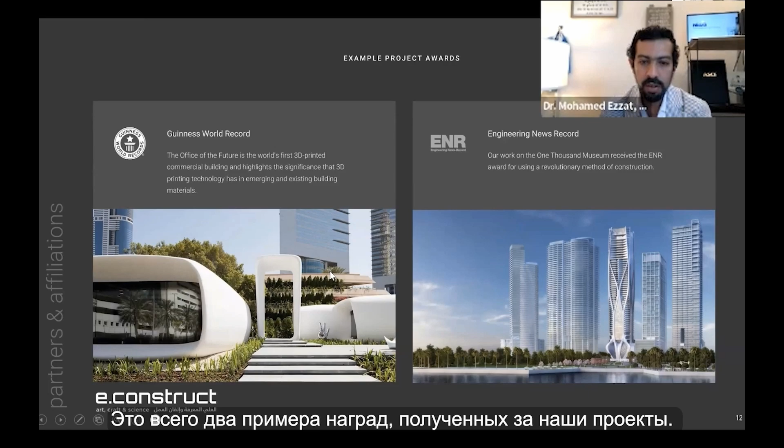Econstruct in general focuses on promoting the value engineering concept in many of our projects. We are collaborating with different contracting and consultation firms in optimizing the cost and time of each project through different value engineering approaches and through innovative design techniques.

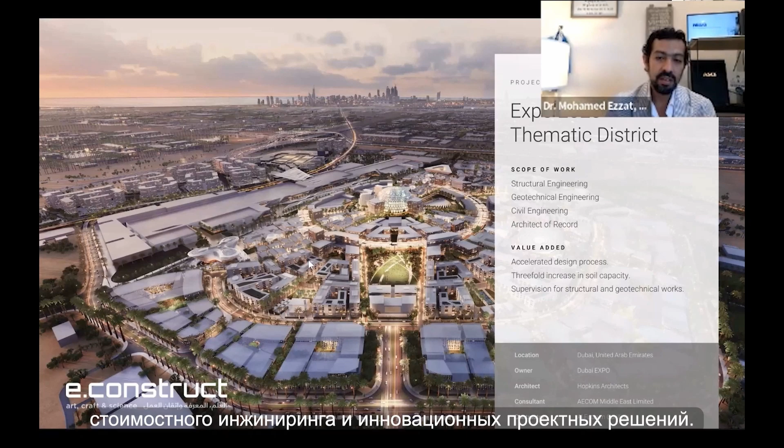One of the most innovative branches in Econstruct is VAES.AI. It's like a sister company working within Econstruct as well, but it's mainly involved in developing new software and AI and machine learning tools to promote engineering applications.

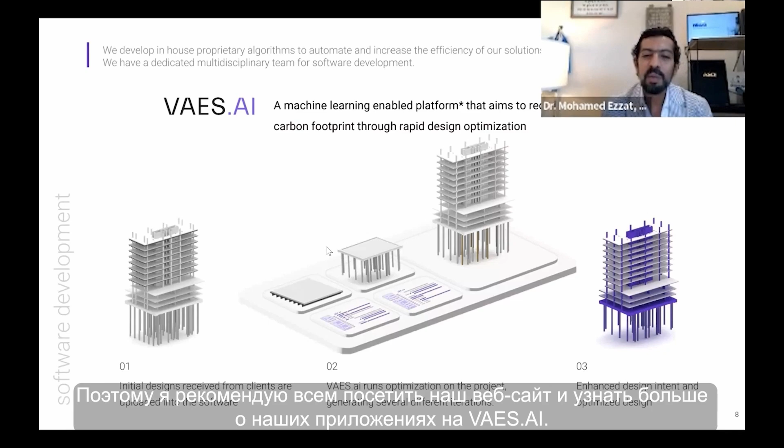Maybe today I will just give a quick exercise related to such an area, but for the geotechnical society, since we are talking today about geotechnical engineering, one of the favorite applications in VAES.AI is an application using a genetic algorithm to optimize pile foundation design. Such an application could help you in optimizing the number of piles, orientation of the piles, and lengths. For sure, all of us spend a lot of time doing hundreds or thousands of trials to optimize such a foundation system. So I encourage all of you to visit the VAES.AI website and know more about our application. Okay, now let's move to our topic today.

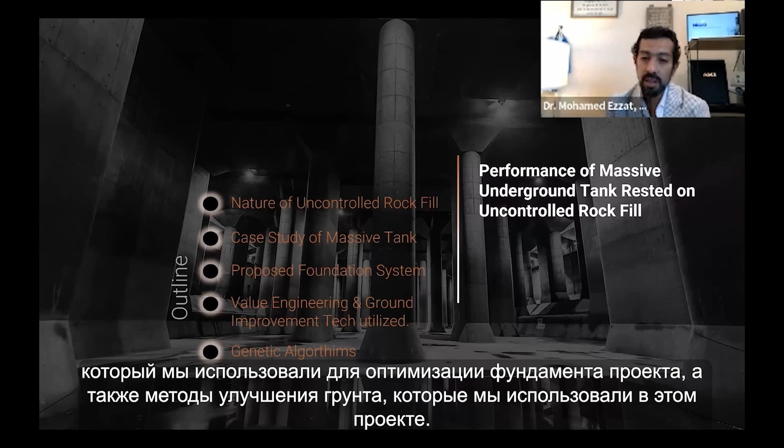As I explained, the title of my presentation will be Performance of a Massive Underground Tank Rested on Uncontrolled Rockfill. The presentation will cover the following items: nature of uncontrolled rockfills, a case study for a massive tank, proposed foundation system for this case, and value engineering, what we did to optimize the foundation system of this project, and the ground improvement technique we utilized in this project.

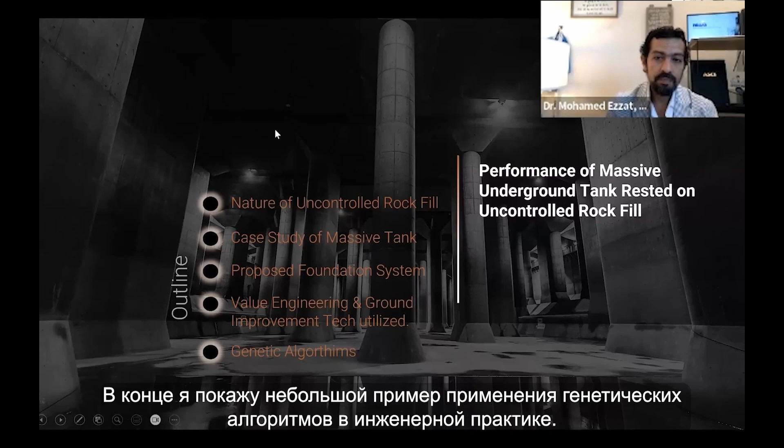At the end, I will show a small exercise for including genetic algorithm in the engineering methodologies. Okay, first, let me give you an introduction or just a definition about the uncontrolled rockfill. What is the nature of uncontrolled rockfill?

Uncontrolled rockfill refers to the placement of rock material without following strict engineering guidelines, such as proper compaction or grading and quality control measures. For sure, this type of fill often contains large voids and may vary significantly in size and composition, which for sure will affect the stability of such rock. As you can see in this picture, there is a large diversity in the sizes of the particles. Uncontrolled rockfill has a high potential for long creep deformation because of the restructuring under the different wet-shrink cycles or even under traditional loading.

Uncontrolled fill can pose a challenge for construction projects, leading to differential settlement, increased permeability, and reduced structural integrity over time. And for sure, careful attention shall be paid if the rockfill structure includes honeycomb-like zones, like you can see here in this picture, that are very loose and may experience local collapse. The extreme inconsistency in lateral and vertical direction is the main characteristic that can indicate the uncontrolled composition, and this can be observed through trial pits. Like the excavation you can see here, many voids can be observed, with large diversity in the particle size.

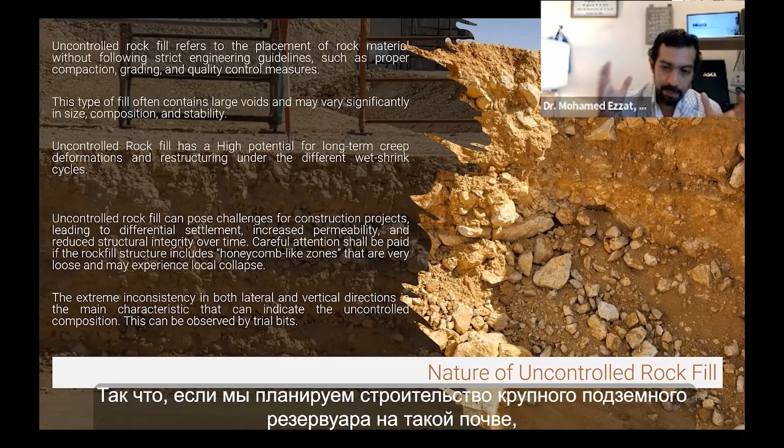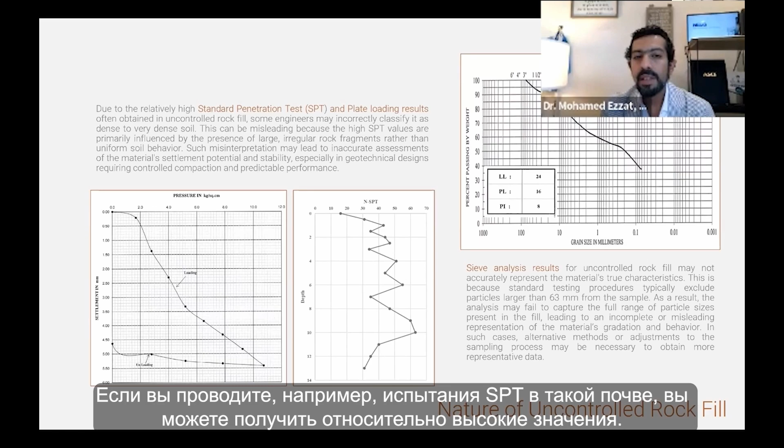So if we are planning to construct a massive underground tank above such a soil, this could be a challenging one. And here I have to clarify this point because this could benefit many geotechnical engineers. If you conduct an SPT test, for example, in such a soil, you may find relatively high values. In addition, if you conduct, for example, a plate loading test, the engineer could obtain very high results. However, unfortunately, some engineers may incorrectly classify this soil as a dense or very dense soil, which could be misleading.

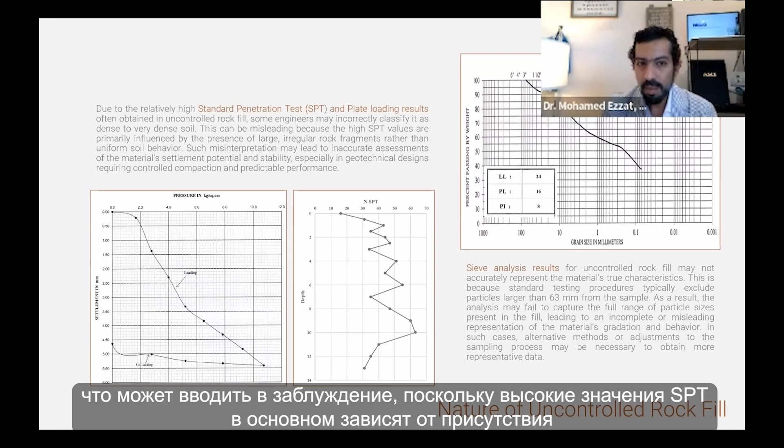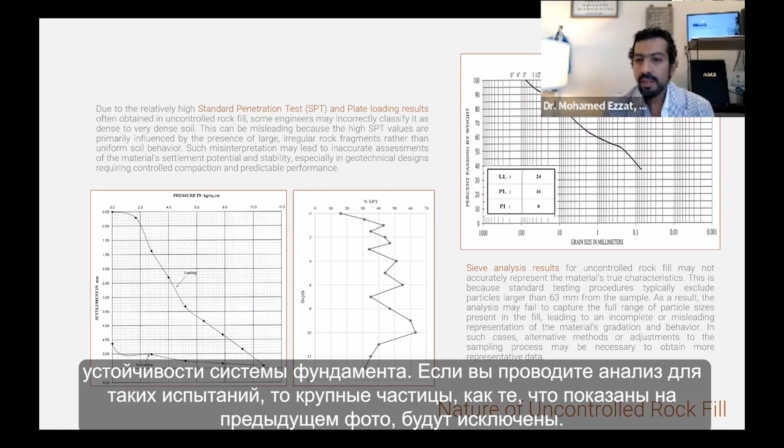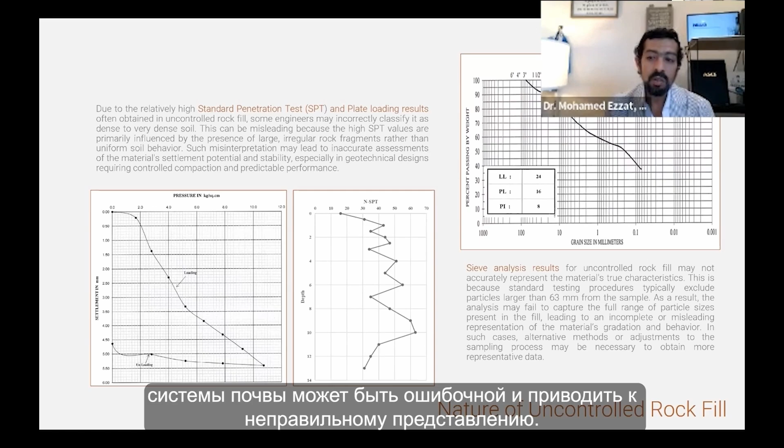Because the high SPT is primarily influenced by the presence of large and irregular rock particles, as you saw in the previous slide, the shape of the soil and the image of the soil. These rock fragments, rather than uniform soil behavior, are huge blocks within this soil. Such misinterpretation may lead to inaccurate assessment of the material settlement potential and for sure the stability of the foundation system. If you do sieve analysis for such tests, for sure, the very large particles like the one shown in the previous photo will be excluded. As you know, most of the standards recommend that particles with size higher than 63 millimeters be excluded from the sample. So you may not experience such large boulders within the sieve analysis test, and accordingly, the classification of this soil could lead to a misleading representation.

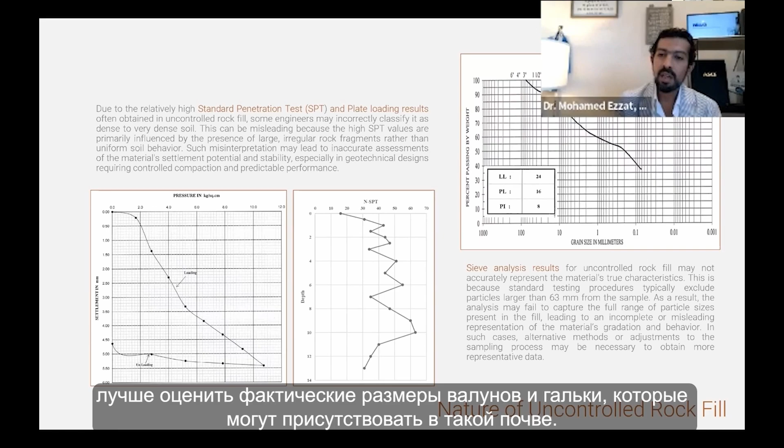So in such cases, alternative assessment methods could be utilized, like trial pits and open cut excavation, to realize the actual sizes of the boulders and cobbles that may exist within such soil. The tank we were planning to construct above such uncontrolled rockfill is a massive tank. Its width was around 37 meters, and the length was around 21.8 meters, with height varying with the level, but at minimum around 6.4 meters. The water capacity of this tank was around 4,000 cubic meters of water. The expected ultimate stress was around 385 kPa, which is for sure a heavy and massive tank.

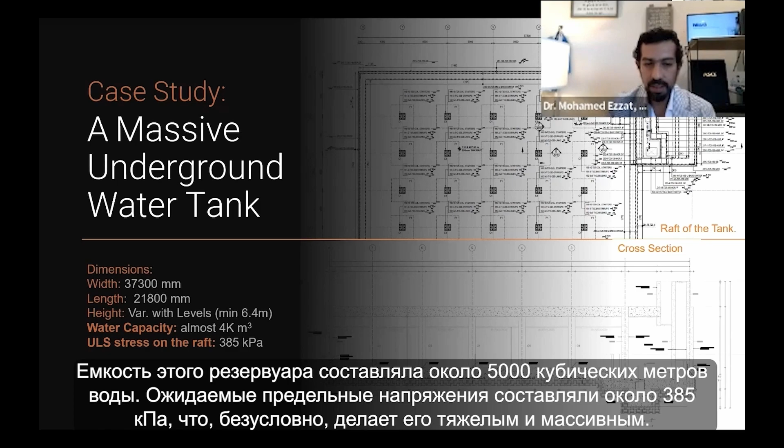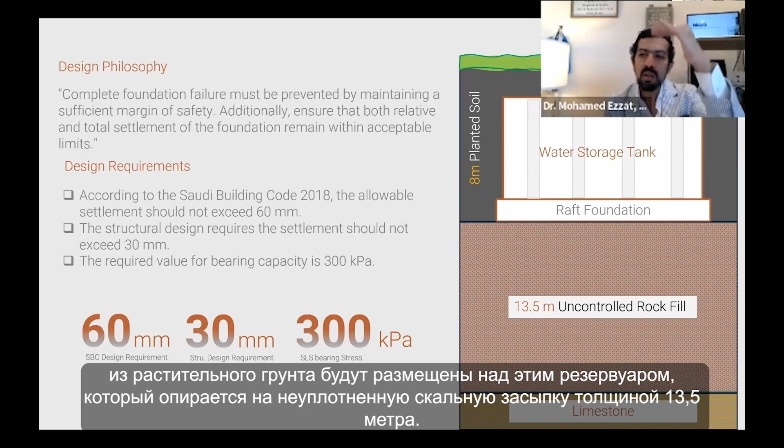This is a summarized cross-section explaining the condition. We have the massive water tank, and 8 meters of planting soil will be filled above this tank, and this tank rests on the uncontrolled rockfill with a thickness of 13.5 meters, and under this uncontrolled rockfill there was a limestone layer. For sure, like any foundation system we design on a daily basis, the foundation design must prevent failure by maintaining a sufficient factor of safety.

Additionally, we have to ensure that both total and differential settlement are within the accepted range. The design requirement for this massive water tank was, for sure, to follow the country standard. According to the Saudi building code, the allowable settlement of any foundation raft should not exceed 60 millimeters. However, the structural design of the tank limits this settlement to only 30 millimeters to maintain the structural integrity of the tank. So we have a strict requirement: the total settlement should not exceed 30 millimeters.

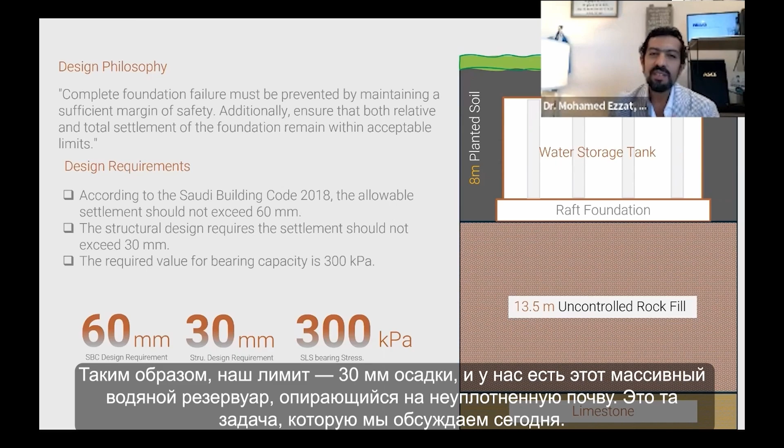Also, the working bearing pressure should not exceed 300 kPa. So we have this 30 millimeter settlement, and we have this massive water tank resting on uncontrolled soil. So this is the challenge we are discussing today.

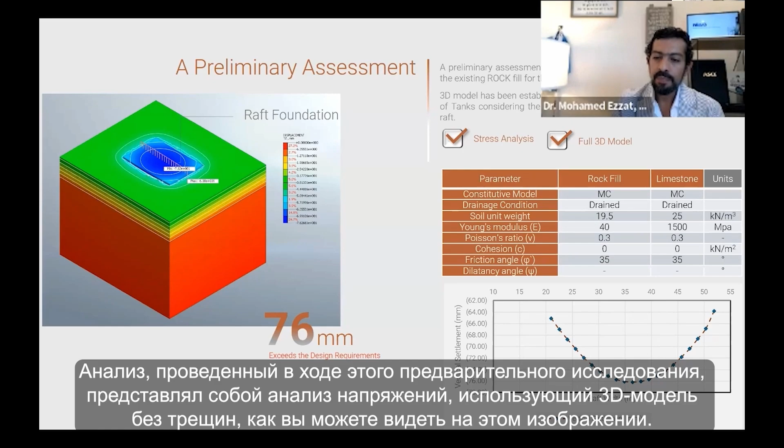After this, we took the second traditional step, which is: what if we replace some of the uncontrolled rock fill with engineering fill with very good properties, with a high modulus of elasticity and high friction angle? We tried to replace the first meter, then the second meter below the raft, then the third meter and fourth meter. So we extended our trial to replace 4 meters below the raft. Through stress analysis in the 3D model, the settlement reduced to 61 millimeters after replacing 1 meter below the raft, then reduced again to 52 millimeters when we replaced 2 meters. Finally, when we replaced 4 meters below the raft, the settlement was 50 millimeters.

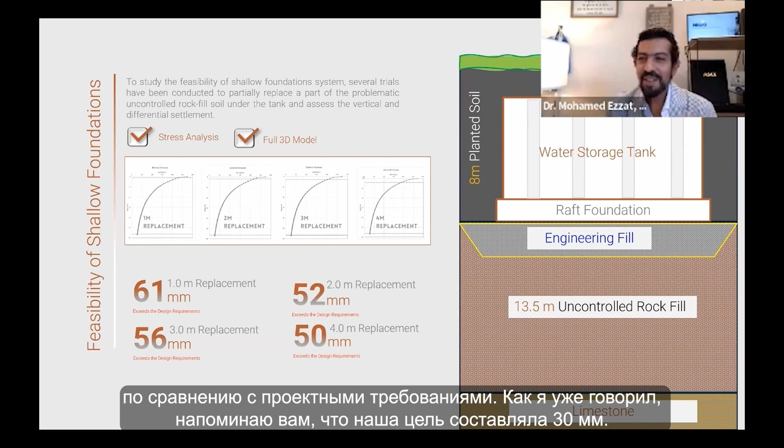For sure, this gives us an indication that the shallow foundation will not be feasible in this case, because this is a very large settlement compared to the design requirement. As I mentioned, and I remind you many times, our target was only 30 millimeters. So we started to think about deep foundations. At one location on the same site, a bi-directional loading test was conducted for one of the piles. So we started to study the result of this loading test before taking the decision on deep foundations. As all of us know, a deep foundation solution is very expensive, and this was not only one tank, it's many tanks distributed across the project. So taking this decision would be a very costly decision.

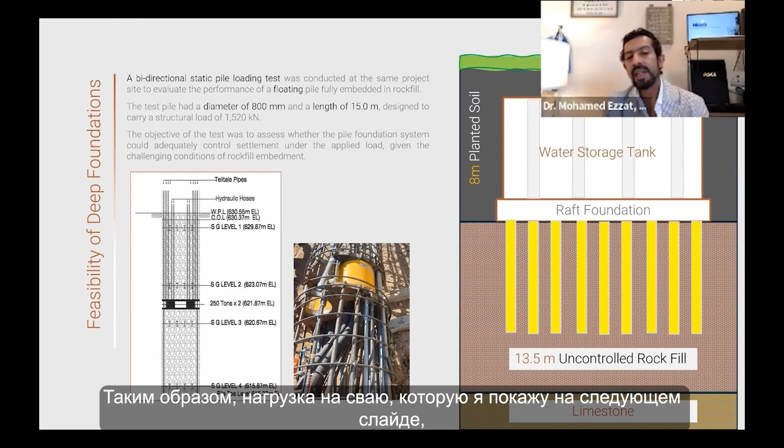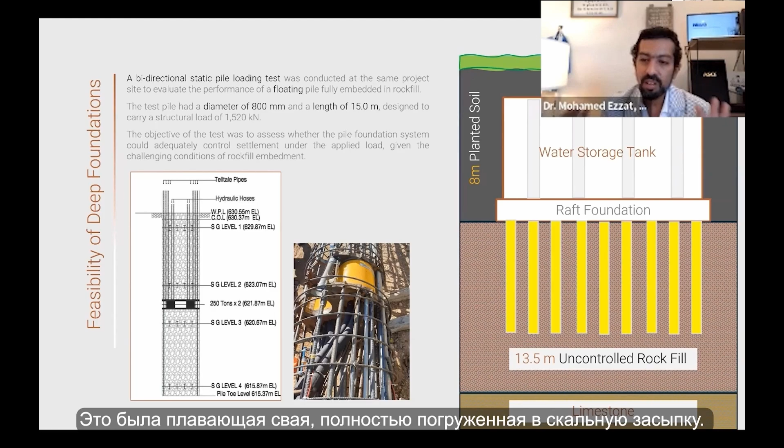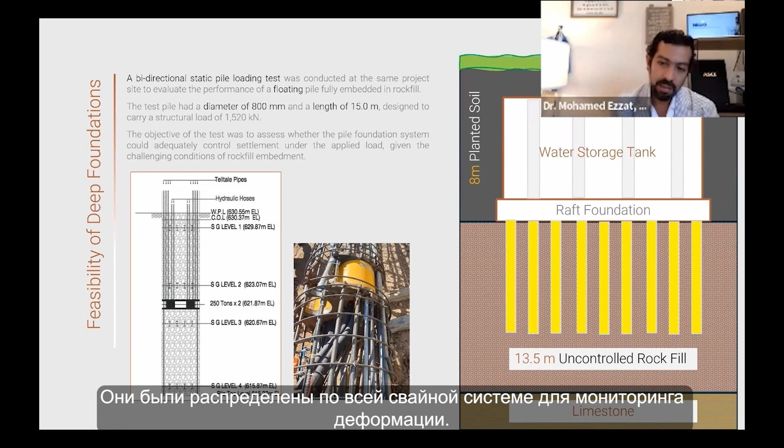Besides, we had to study whether this deep foundation or pile system would be feasible if implemented within this uncontrolled rock fill. The pile load test, which I will show in the coming slide, was for a pile with a diameter of 800 millimeters and a length of 15 meters. It was a floating pile completely embedded in the rock fill layer. This is a traditional setup of the bi-directional static pile loading test, where the upper part is pushed up and the lower part is loaded vertically. For sure, there were strain gauges distributed along the pile to monitor the deformation at several levels.

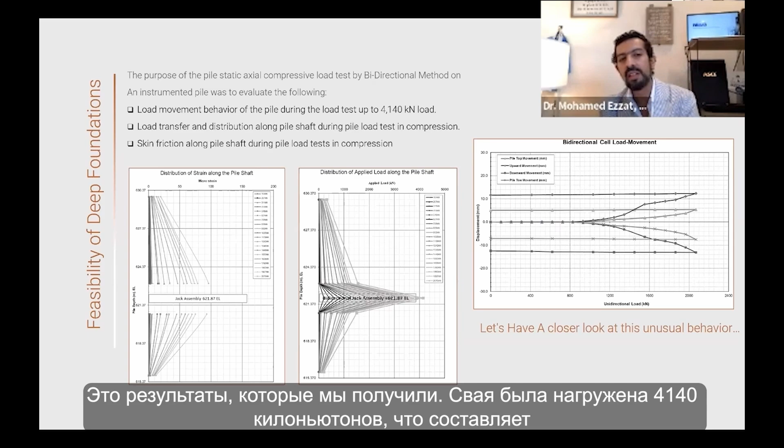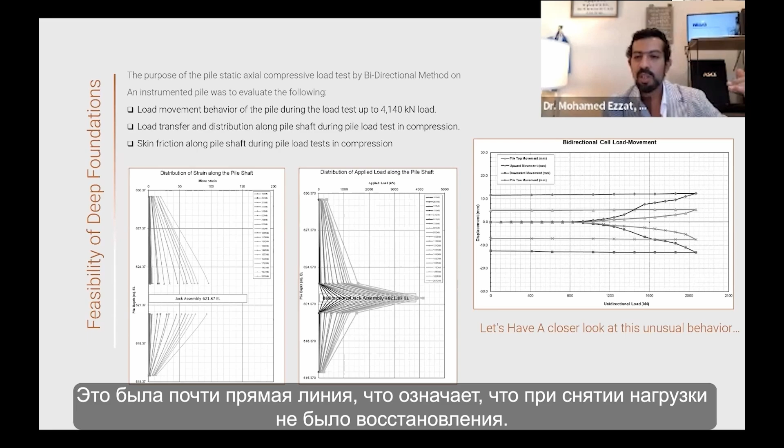These are the results we obtained. The pile was loaded with 4,140 kilonewtons, which was three times the design load of this pile, and the load transfer and load distribution along the pile were measured. You can see here the unusual behavior of this pile. When the pile was loaded, the unloading behavior, for example in the lower part, was almost a steady line. It was almost a straight line, which means that no rebound was obtained when the load was removed. So when the load was applied, settlement for sure started to increase, and when the load was relieved, no unloading deformation was obtained, or only very minor values. So let's dig deeper and take a closer look at this unusual behavior. I'm not sure if you have experienced something like this before or not.

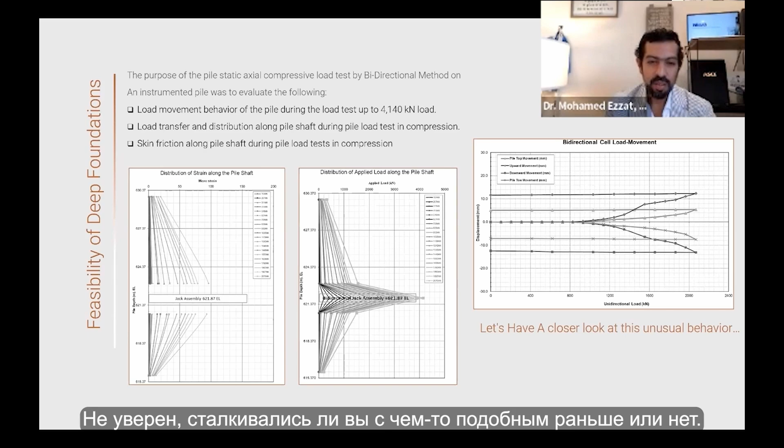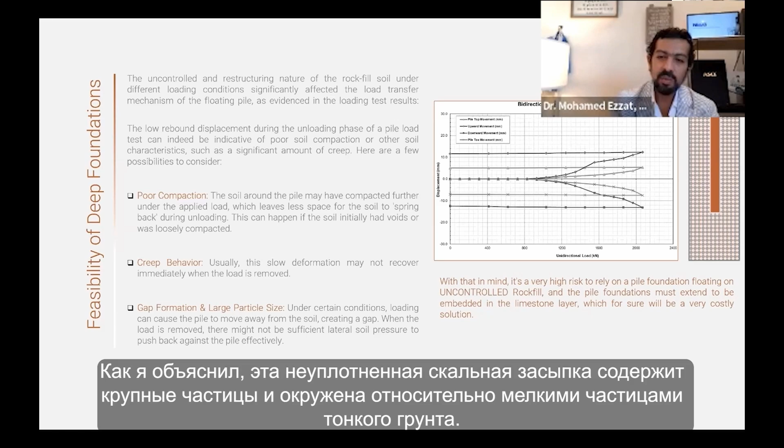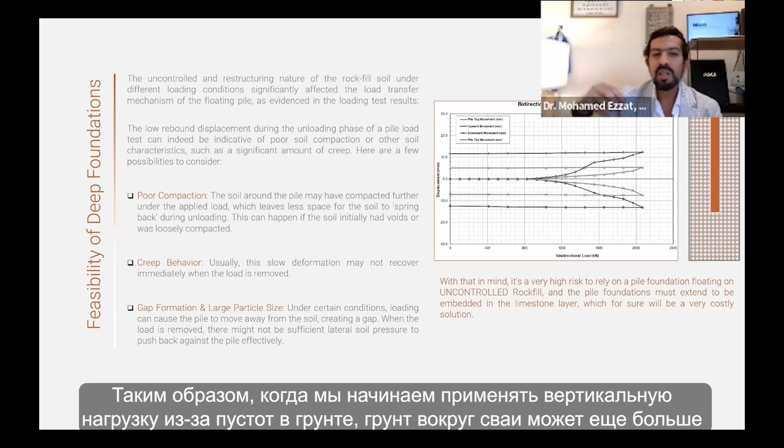This was our expectation about the behavior of this point. As I explained, this uncontrolled rockfill has large particles surrounded with relatively small particles of fine soil. So when we start to apply the vertical load, due to the poor compaction, the soil around the pile may be compacted further under the pile load, which leaves less space for the soil to spring back. This means that the applied load continued the compaction process, which was initially poor. This can happen in soil that initially had voids or very loosely compacted soil.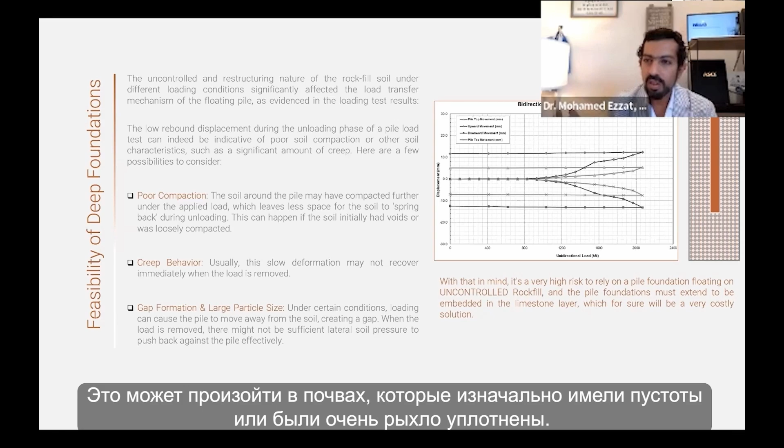The second expectation was the creep behavior. Usually, the slow deformation may not recover immediately when the load is removed. The third expectation was the gap formation. As you saw in the image of this uncontrolled rockfill, there are what we call honeycomb-like zones. Under certain conditions, the loading can cause the pile to move away from the soil, creating a gap between the pile and the soil. When the load is removed, there might not be sufficient lateral pressure to push back the pile effectively. That's why the unloading deformation was very minimal in that case.

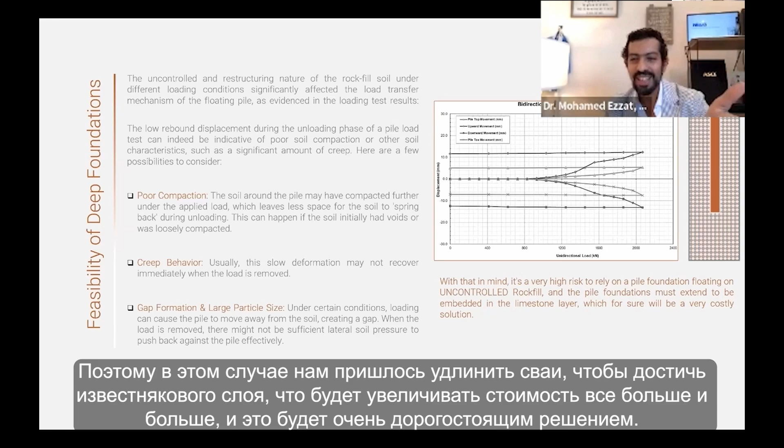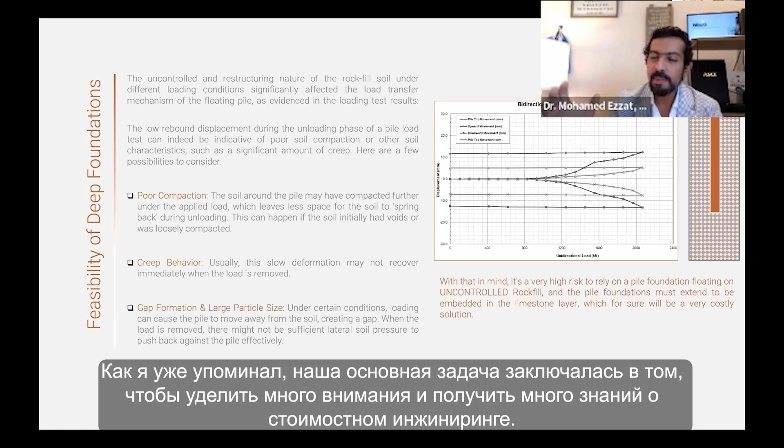So with that in mind, it could be very, very risky to rely on a pile foundation floating in uncontrolled rockfill. So in that case, we had to extend the pile length to reach the limestone layer, which will increase the cost more and more, and will be a very, very costly solution. So with this, we mainly commented on the feasibility of shallow foundation and deep foundation in such a case. As I mentioned, our scope is mainly to give a lot of attention and care to value engineering.

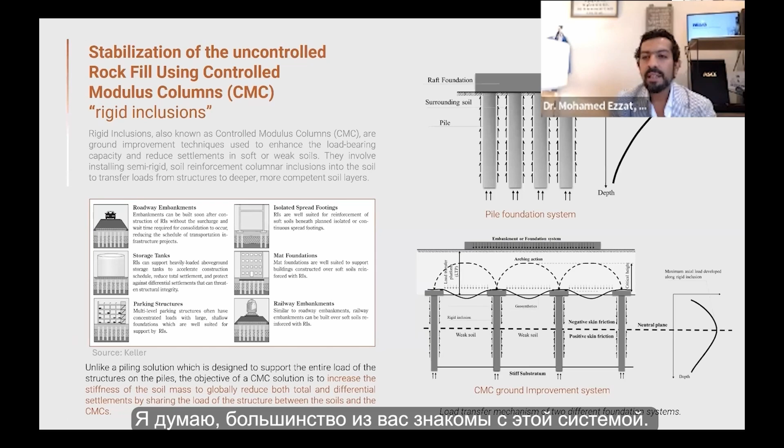So what was the proposed solution for this unique case? We proposed stabilizing this uncontrolled rockfill using controlled modulus columns, which is CMC, or commonly known as rigid inclusion. I guess most of you may be familiar with this system. It's a column installed inside the soil that will be stabilized, and above these columns there will be a load transfer platform, LTP, and the foundation system, like any shallow foundation system, is placed above this load transfer platform.

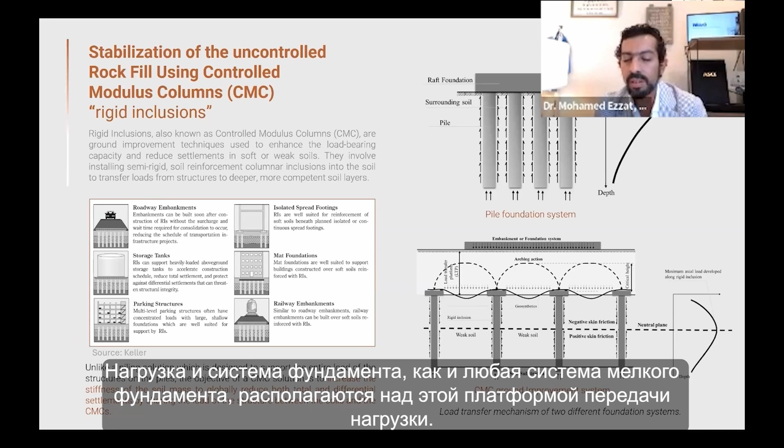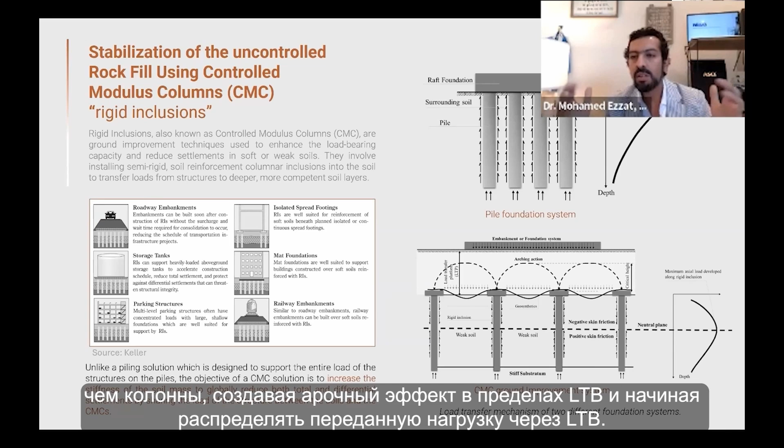The main load transfer mechanism of this system is the arching action. When the load is applied above the LTP, the soil between those columns will settle more than the columns or the piles. So this will create arching action within the LTP and start to distribute the load through the LTP onto the pile head more than the inside soil. It's commonly used in several applications like roadway embankment, storage tank, parking structure, isolated spread footing, mat foundation and railway embankment. For sure, it's commonly used also with storage tanks like the case we are experiencing today.

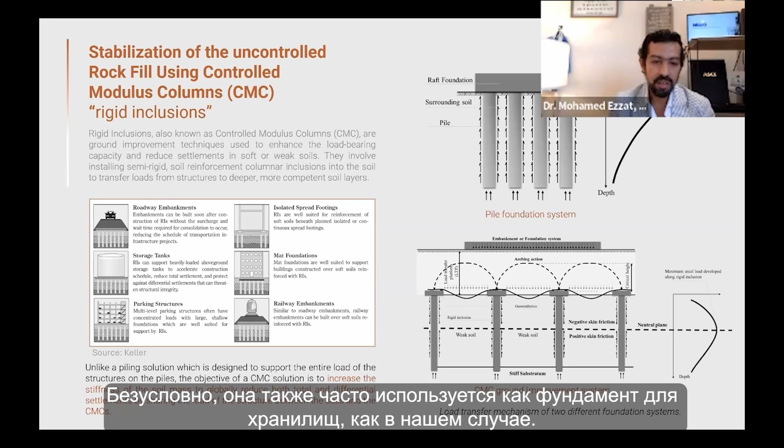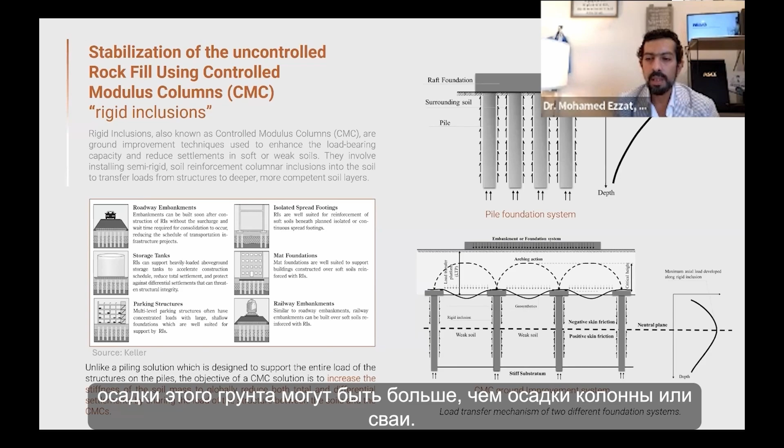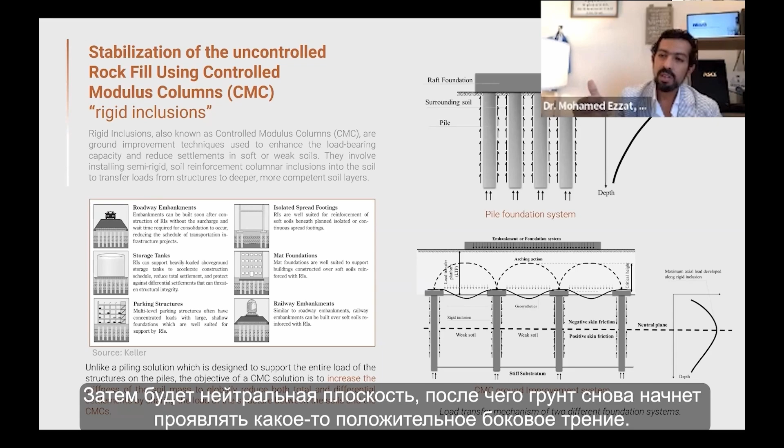The main difference between the behavior of a pile foundation and a CMC system is the load transfer mechanism. Mostly, if you have the pile within good soil, you will have the traditional pile load distribution, where some of the load will be transferred through friction, and some of the load will be transferred through bearing at the base of the pile. So this is a traditional positive skin friction most of the time. In the CMC case, since we are dealing with an expectation of high settlement or soft soil, the settlement of this soil could be more than the settlement of the column or the pile. So there is a great expectation for negative skin friction, like you can see here. Then there will be the neutral plane, then the soil will start to have some kind of positive skin friction again. So the load distribution could take this shape.

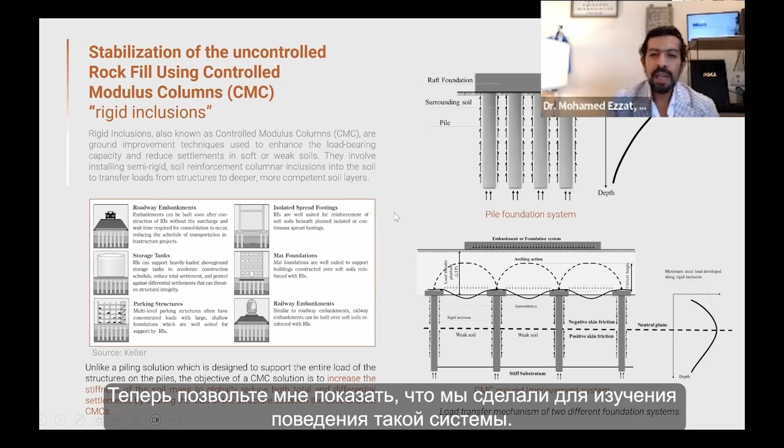Now let me show what we did to study the behavior of such a system with our tank. This is a 3D finite element model we developed using MIDAS GTS NX, and it was again a stress analysis to study the settlement. As you can see here, the soil layers were simulated: the rock, uncontrolled rockfill, then the limestone layer, and above this layer there will be the LTP, which is a granular soil with very good properties, with a high friction angle value and a relatively good modulus of elasticity.

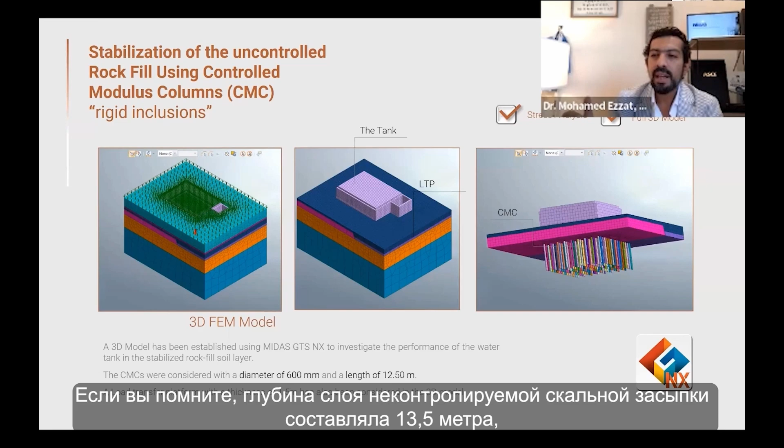And then under this LTP, there will be the columns or the CMC piles, which are distributed in a square pattern. We tried 600 millimeter diameter columns with lengths of 12.5 meters to rest on the limestone layer. If you remember, the depth of the uncontrolled rock fill layer was 13.5 meters, and if you deduct the LTP thickness, you will have about 12.5 meters length of the columns.

So what we found is that CMC with the LTP was able to control the settlement of this raft. If you can see here, the settlement of the raft has significantly reduced to 26 millimeters, which is less than the 30 millimeter benchmark, our target value based on the design requirement. Also, we checked the settlement of the columns themselves. It was also within the accepted range. The vertical stresses of the raft were also within the range, which may confirm the viability of this solution.

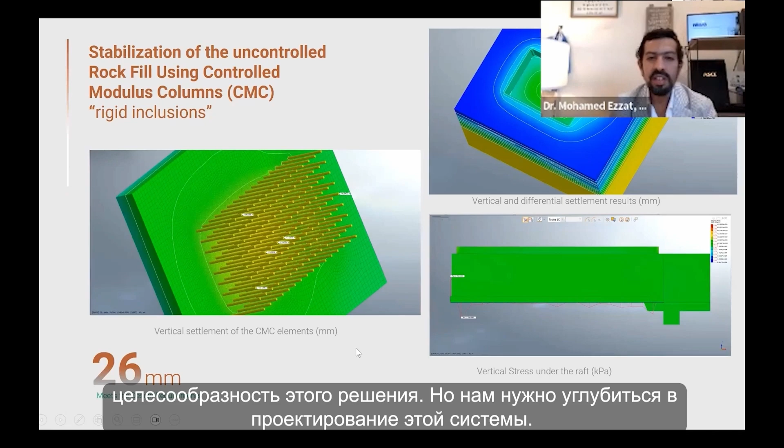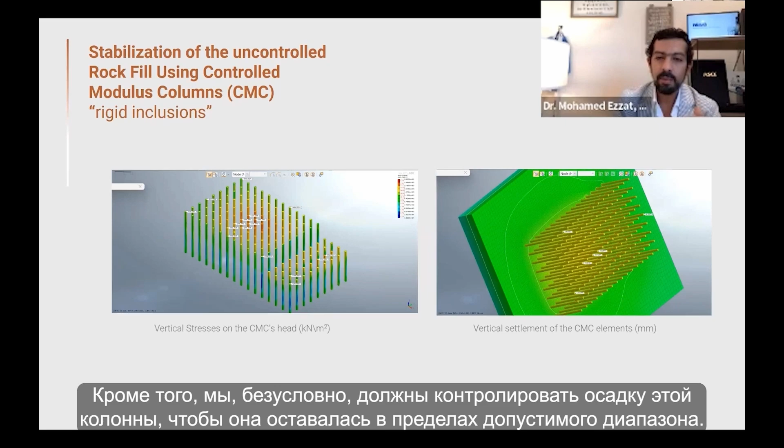But we have to dig more to start the designing process of this system. So we start to explore the differential settlement between the columns, the corner ones and the central ones, and the variation in load transfer to each column. As you know, these CMC columns are plain concrete, so we have to check the structural design of these plain concrete columns and make sure that the applied load transferred from the raft will be less than the structural capacity of such columns. In addition, for sure, we have to control the settlement of this column to be within the accepted range. To do this, we start to extract the results from the MIDAS GTS model.

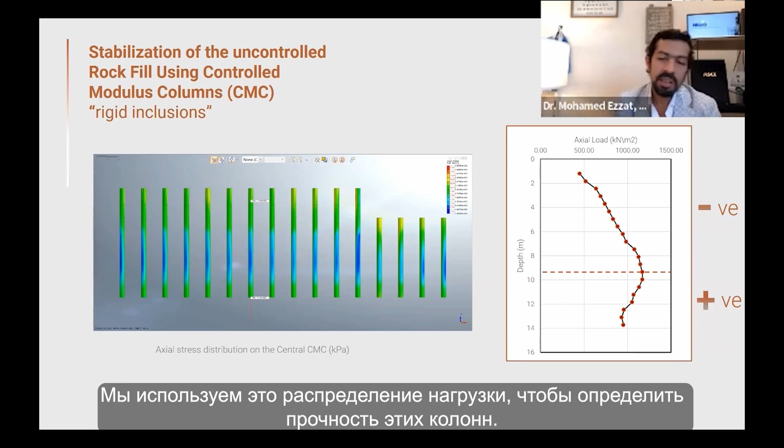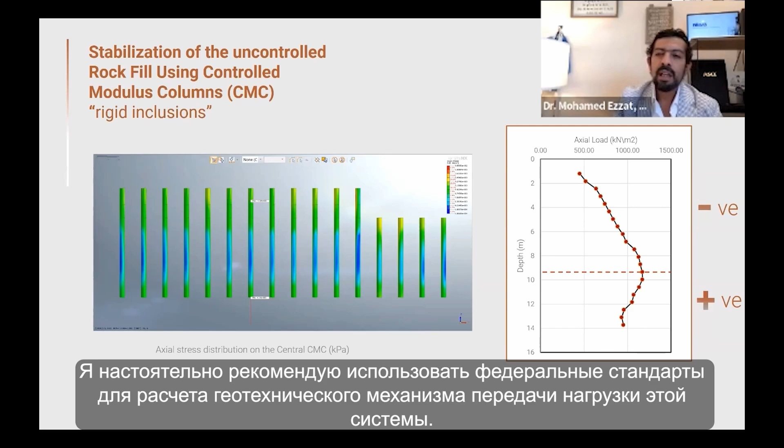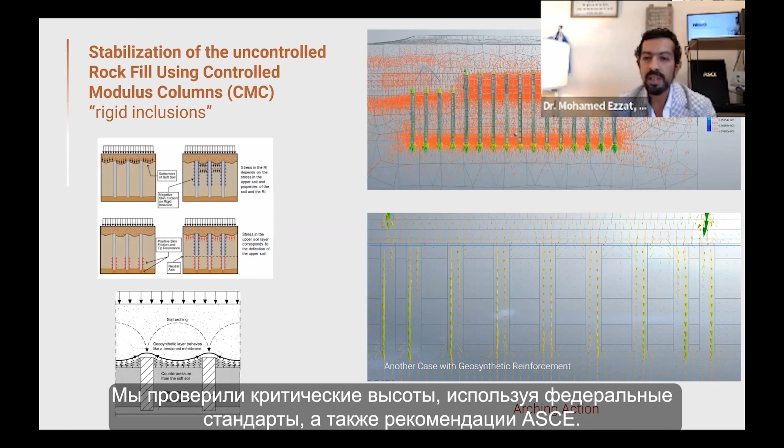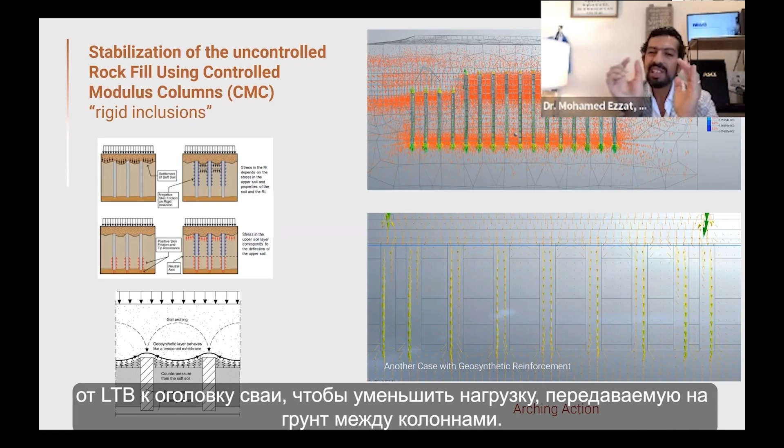We use this load distribution to obtain the geotechnical capacity of these columns. I highly recommend using the Federal Highway standard to calculate the geotechnical capacity and load transfer mechanism of this system. As I explained, the main concept of such a system is arching action. So we had to ensure that the thickness of the LTB utilized in our system will be sufficient to generate the arching action above the column heads. So we checked the critical heights using the Federal Highway standard and the ASCE recommendations as well. The arching action, as I explained, transfers the load from the LTB to the pile head to reduce the load transferred to the in-between soil.

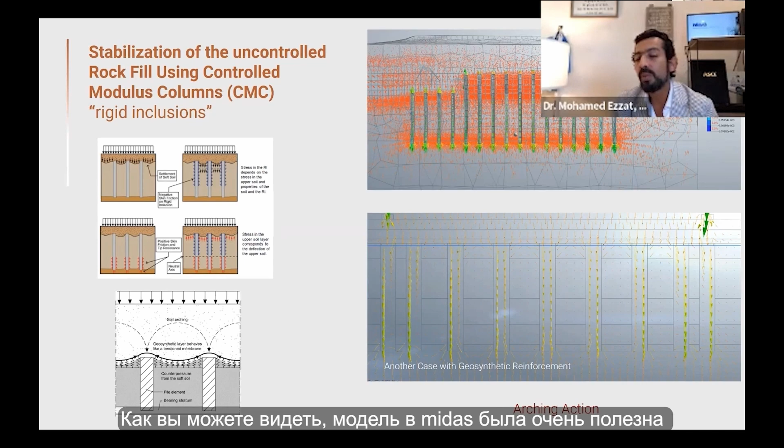As you can see here, the Midas model was very helpful in ensuring the arching action. The vectors' direction confirms the load transfer direction. As you can see here, the load has arching action, transferring most of the load to the columns. For sure, a portion of this load will be transferred to the soil, which is fine and leads to the negative skin friction, but we have to check that the soil is also able to resist this load. For the uncontrolled rock fill, we had no problem with the bearing capacity and the shear strength of the soil. As I explained, it already has very high frictional values. The main problem was the restructuring and uncontrolled settlement of the soil. It was not a load transfer problem.

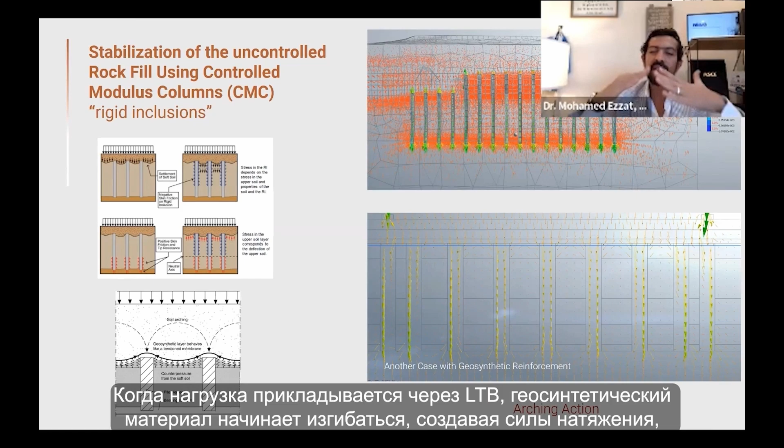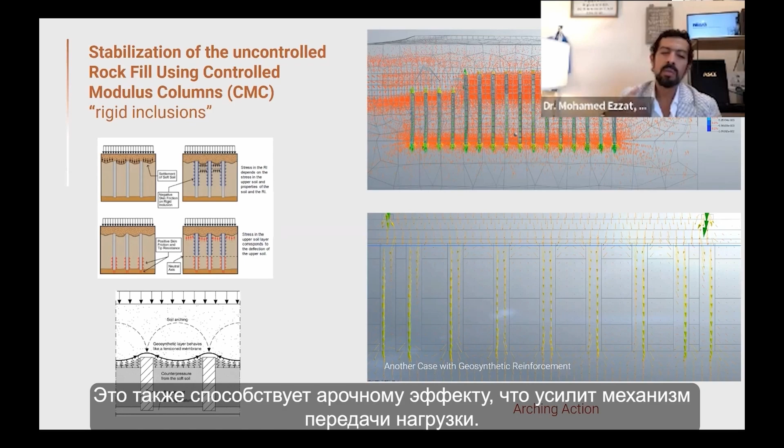So this photo below is for another case, where we can utilize geosynthetic reinforcement within the LTB, which is also a common practice. It's used if you are experiencing large shear stresses through this LTB. We can also use the geosynthetic to increase the efficiency of load distribution. When the load is applied through the LTB, the geosynthetic will start to bend, generating tension forces, and will contribute to distributing the load among the column heads, like you explained here. This also promotes the arching action, which will enhance the load transfer mechanism. So I guess these photos are very clear on the load transfer mechanism of such a system.

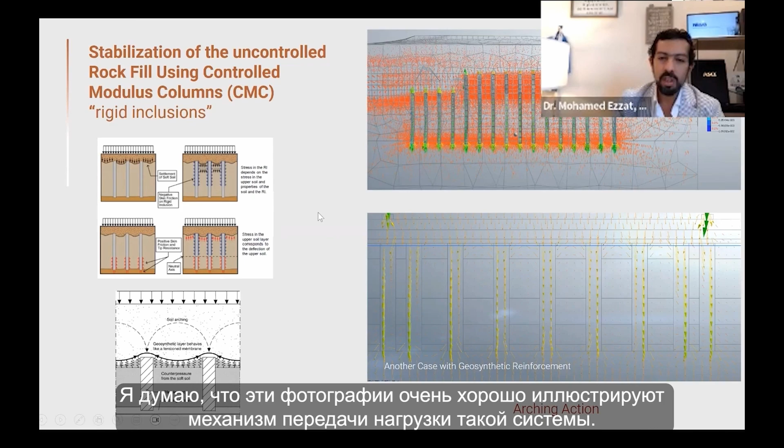Again, we go back to the value engineering. The first distribution of the columns we proposed was, as I explained, 12.5 meters column length, distributed in a square pattern. The total number under this tank was around 150 columns. So we started to conduct some parametric analysis to find the most optimum solution for this case.

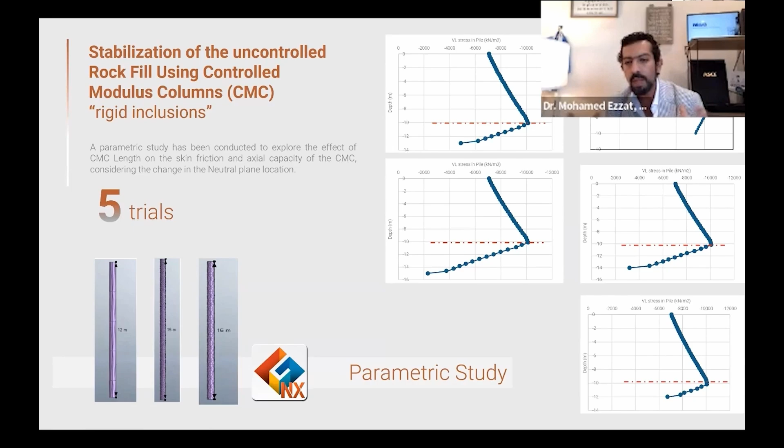And we tried to change the pattern of the CMC distribution among the raft under the LTP, for sure. And we tried to change the length of the pile. As you can see here, this is just a few samples from the trials we conducted. We tried to change the length of the pile with different lengths: 12 meters, 15 meters, 16 meters, and so on. So as you can see here, the neutral plane was changing with the changing of the depths.

For sure, this is a function of two main items: first, the settlement of the pile and the settlement of the soil, and the shear stresses at the interface between the pile and the neighboring soil. For sure, the neutral plane, the common definition to figure out its location, is the point at which the settlement of the soil will equal the settlement of the pile, which means after this, the skin friction will start to be in

a positive direction. In addition, at this neutral plane, the shear stresses at the interface between the soil and the pile will be zero, which means that the skin friction will start to turn to be in the positive direction. So to know the location of this neutral plane, you have to simulate the behavior and establish a numerical model like the one I presented. And to optimize your solution, you have to conduct hundreds of trials to achieve the best distribution of the piles, the best pattern of the distribution.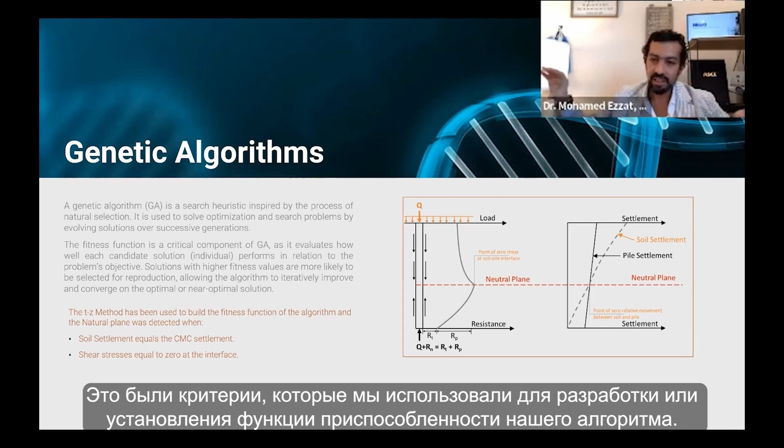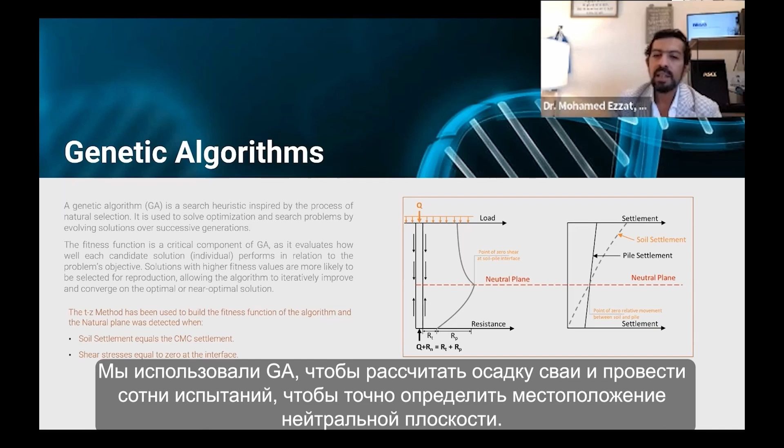In our case, the location of the neutral plane, as I explained here, was the location at which the soil and pile settlement will be equal, and the difference of the shear stresses at the interface between the soil and the pile will tend to be zero. This was the criteria we utilized to establish the fitness function of our algorithm. We utilized the t-z method to calculate the pile and soil settlement and conducted hundreds of trials to know the location of the neutral plane in an accurate manner.

And this is a quick video. You can see here the software we developed, the algorithm I mean. Here we are uploading the Excel files we obtained through MIDAS GTS NX.

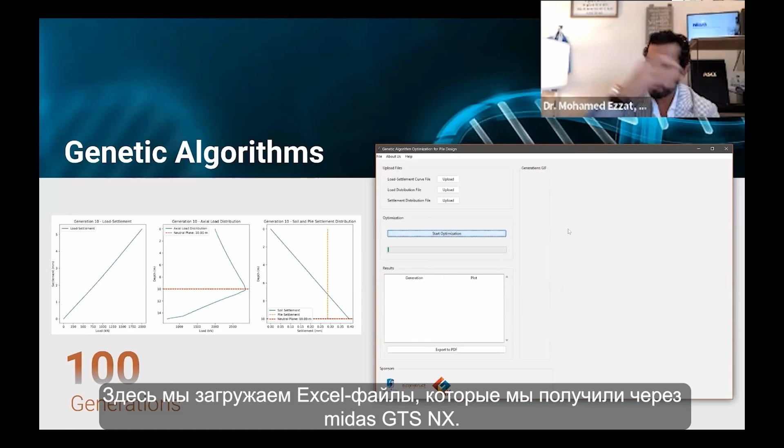Then we started the optimization process. As you can see here, a lot of generations are developed, and in each generation many trials are conducted, changing the length of the pile and start experiments or calculating where the neutral plane will be.

For sure, many of these generations could not meet the fitness function we defined, which, as I explained, is that the pile and soil settlement shall be equal and shear stresses should be zero at the interface. So here, as you can see, there is a result of the generations.

For each one, the algorithm is calculating the load settlement behavior and the load distribution of the column, the settlement of the pile, and the settlement of the soil, and starts comparing them. It compares the pile settlement and soil settlement and finds the location of the neutral plane among the whole generation.

As you can see here, this was generation number 10, which meets the criteria. This algorithm conducted 100 generations, which is 100 trials. And as you can see here, the location of the neutral plane obtained was around level 10 meters.

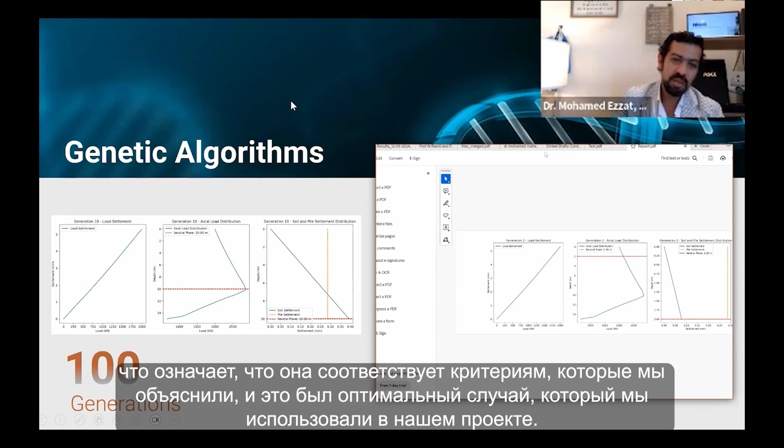And at this line, as you can see here, the skin friction tends to be positive, and above this it was negative, and at the same location the settlement of the soil becomes equal to the settlement of the pile, which meets the criteria we explained. This was the optimum case, which we utilized in our project.